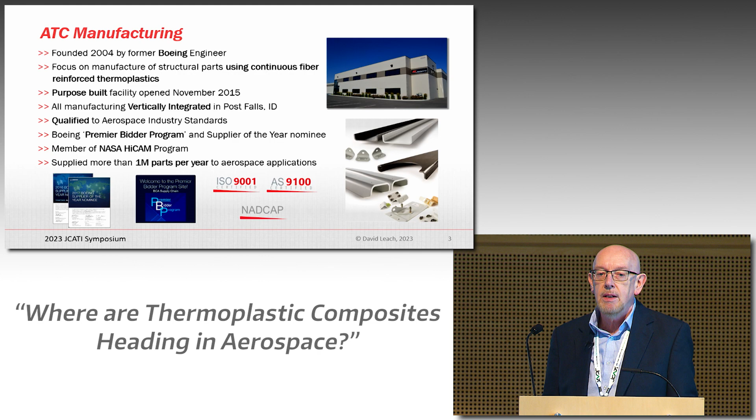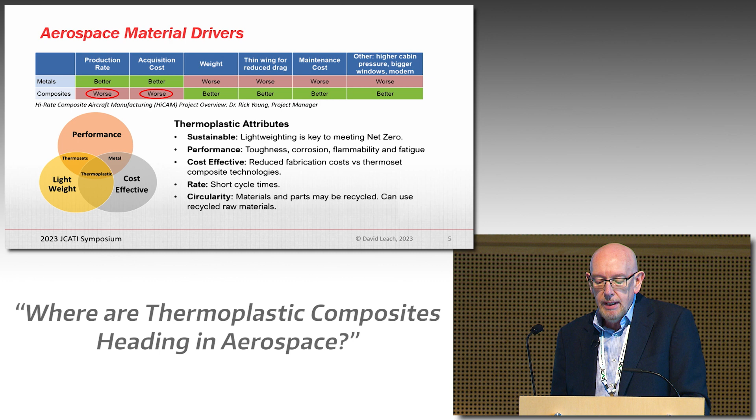Cost effectiveness in terms of very fast cycle times and therefore lower overall fabrication costs, and of course can meet high rates. In addition, I was talking to some of the poster sessions involved with recycling there.

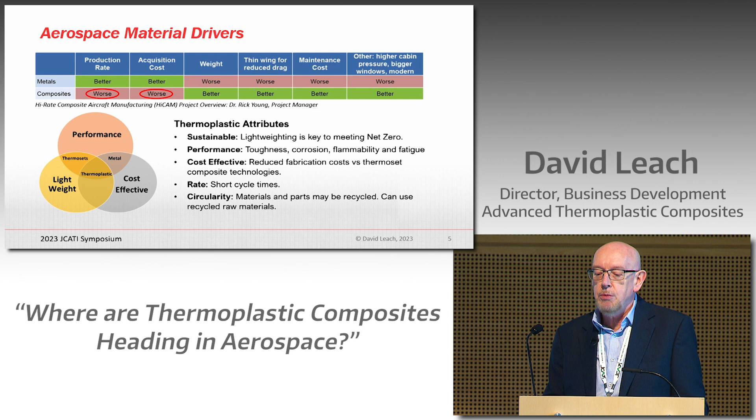Very interesting that with thermoplastics you can recycle them. I should perhaps more accurately say downcycle, because you can take the thermoplastic composite and often chop it, shred it, combine it with other polymer, and then compression mold or injection mold it. And indeed, another side of that is some of the materials we're working with, not so much in structural applications, but more on the interior side, actually use recycled carbon fiber as their input material going into that.

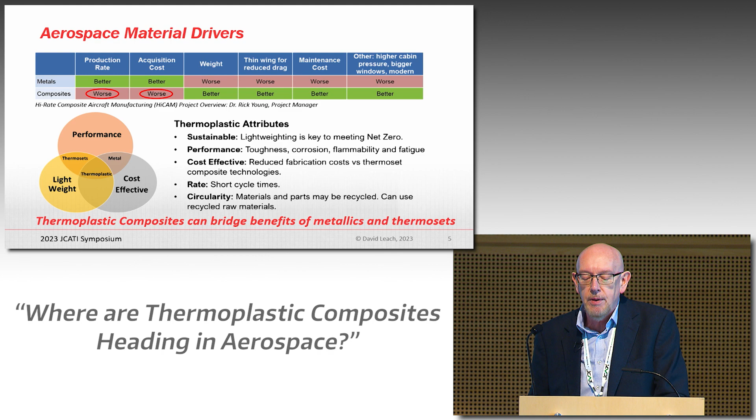So thermoplastics can certainly bridge some of those attributes of both the metallic structures and composite and current thermoset composites. Just another chart related to this.

So certainly for small and medium-sized parts, their conclusion was thermoplastics really offer a pretty compelling advantage, in many cases even over metallic parts as well.

Of course, some of that comes from the handling of the materials. Thermosets require frozen storage, out time issues with thermosets. You lay them up ply by ply, whereas with thermoplastics you can do much more automated processes. Other aspects I mentioned are performance, and we'll also come on to assembly and recyclability as well.

So certainly thermoplastics can offer a really compelling advantage over some of the current materials. Of course, the obvious question is, so why aren't we all building planes out of thermoplastics now?

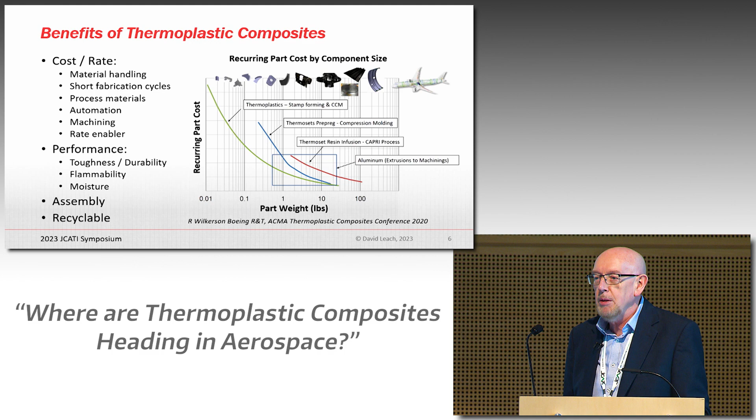Well, some of the materials have not been very readily available. We're talking about very high temperature processing often with these polymers. And the process technology to both impregnate the fibers with these very viscous polymers and then to turn them into a finished part is one of the areas that's really been developing over the last couple of decades.

And so these polymers that I'll be talking about in some of the talk today all have very good resistance to all the environments you'd come into contact with in aerospace, things like jet fuels, de-icing fluids, hot hydraulic fluids, and even in the space area, things like liquid oxygen. These materials are very resistive to that and very tough as well.

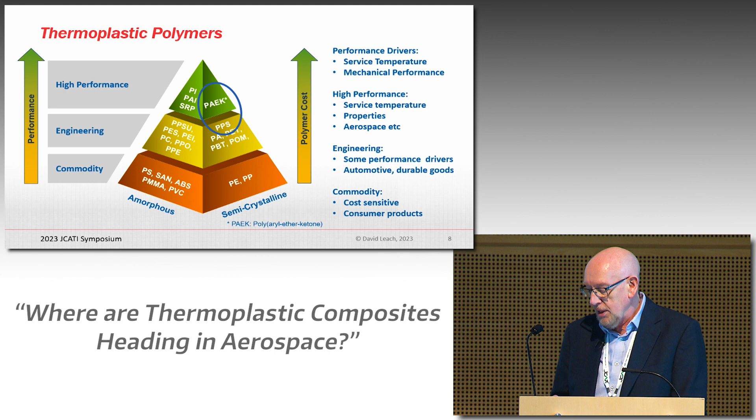When I talk about the range of product forms, then, we're taking that polymer, combining it with a fiber into a composite material. Of course, there's quite a wide range of composites you can make, everything from the very short fiber materials, which can readily be...

extruded, injection molded, compression molded, through to the very highly reinforced materials that are equivalent in terms of fiber content, fiber orientation, to the state-of-the-art thermoset prepregs. So things that are up in the region of 60% fiber volume, unidirectional tapes.

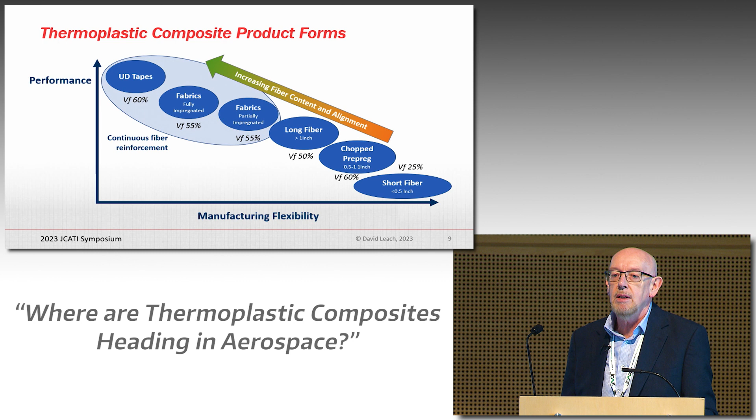So when we're looking at this context with aerospace composites for structural applications, I'm really talking about the things at this very left-hand end here that are really pushing the performance. Although, of course, with that, there's limitations in the manufacturing flexibility with continuous fibers and again, very viscous polymers.

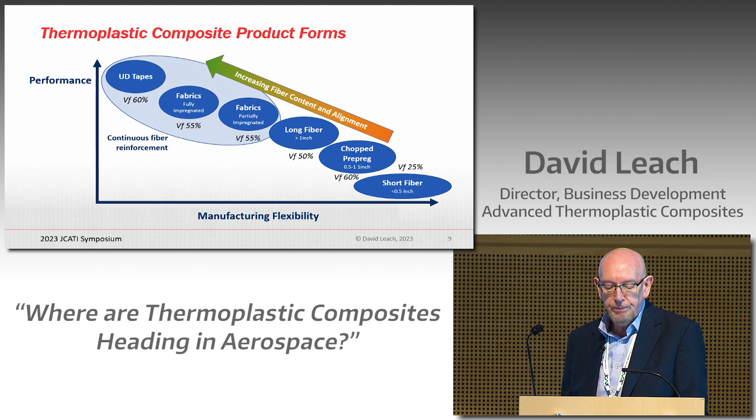Now there are quite a range of materials available. If you went back maybe 10 or 15 years, the range of materials was extremely limited—maybe a choice of one unidirectional tape and a couple of fabric materials, and that was about it. Now there's quite a wide range of different composites available, starting with fully impregnated unidirectional tapes available from many suppliers with many different polymers.

There's an illustration here from the Thermoplastic Composites Research Center people, showing photomicrographs across three different prepregs from three different suppliers. Nominally these are the same polymer, the same type of fiber, the same fiber areal weight, and the same resin content. Yet the fiber-resin distribution can be very different depending on the prepreg technologies used. This is one of the things I'll be talking about—the interaction of the material or product form with the processing, which is often very key with thermoplastic materials. You'll see quite differences in terms of uniformity of thickness, fiber-resin distribution, and degree of impregnation.

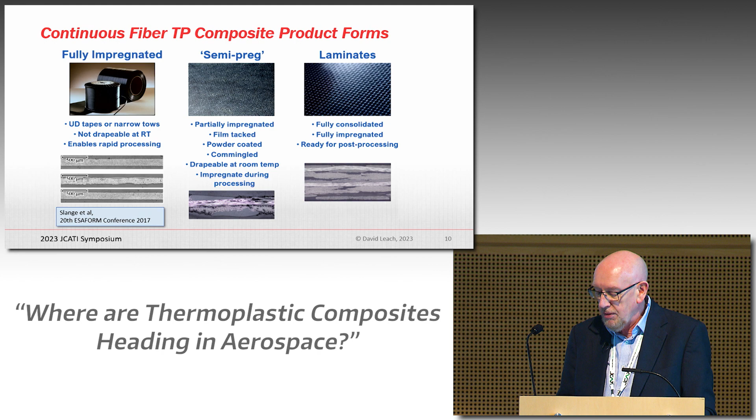So basically there's quite a wide range of material forms now available in terms of polymers, reinforcements, and overall product forms. As I mentioned, you have this trade-off: fully impregnated forms can be processed very quickly because the impregnation has already been done and fibers are fully wetted out, versus partially impregnated forms, which have the advantage of handling and drapability at times—but you have to impregnate them during processing, which means a longer time.

The materials are maturing—things like the consistency of the prepregs and degree of impregnation have definitely been improving. Another point is around databases. In aerospace we typically need certified databases and design allowables, material specs, and process specs. Until recently that's been the domain of the OEMs who have the horsepower to generate that information. But now more materials are being added to the NCAMP databases—that's out of NIAR, the National Institute of Aviation Research at Wichita State, which has standard specifications and databases. I think there are now three thermoplastic materials with full NCAMP quals, and quite a number more in process. That means information on properties, design, and process specs is coming more into the general domain and can be used by anyone, as publicly available databases.

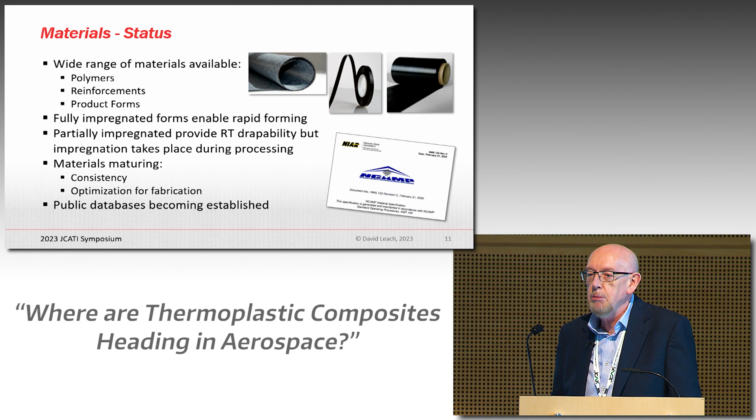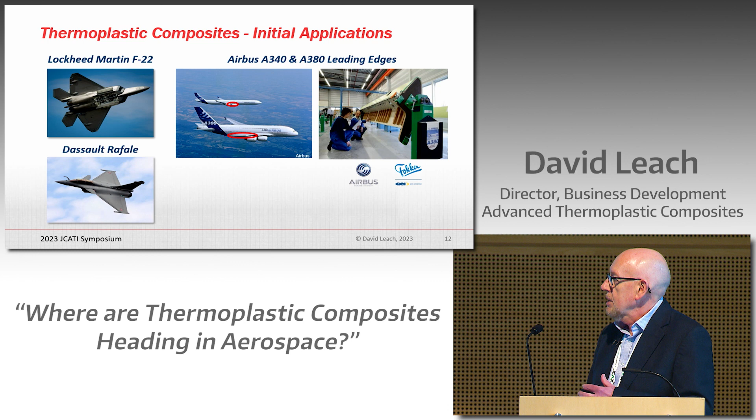If we talk about some initial applications for thermoplastics, going back 20-plus years when some of these materials were first coming out, the initial emphasis was much more driven by performance, particularly toughness and temperature. As an example, on the F-22, the weapons bay doors were made out of thermoplastic—actually a PEEK IM7 material. Also in Europe, the Dassault Rafale's internal center fuselage section was done in thermoplastic, again a PEEK material. Some of the reasons on the Dassault were because it's around the area of the engine—they were looking for both high temperature performance and flammability resistance in case of an overtemp condition.

Also in Europe, with some of the fabric materials, they were adopted by Airbus and GKN for the leading edges—the inboard for the A340 and the outboard for the A380. That's been pretty well publicized, with a lot of information available on it.

I'd characterize some of these initial applications as more point applications, where people were really learning how to process the materials, often using techniques borrowed from thermosets to form the finished parts, which was not optimum in terms of cost or rate. But it was important in demonstrating some of the early applications of thermoplastics and their benefits.

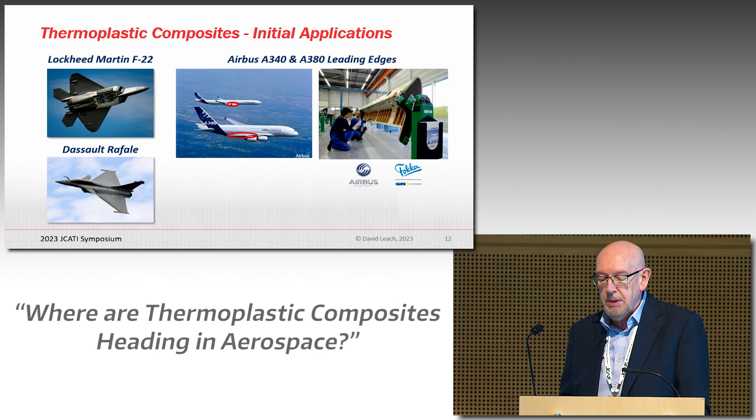So if we come to how we're making parts today, which has progressed since that time, we typically start with material preparation. Again, these are dry boardy materials if we're starting with the prepregs. So we have to assemble those prepregs, often with highly automated processes, into the layups we need, and get the plies assembled, because you have to tack those plies together. The materials don't have any inherent tack, so you're often using either thermal or ultrasonic tacking to prepare that.

Then very automated processes make a laminate or a blank, which is then thermoformed or stamp formed, usually rapidly formed into the finished part, or alternatively going through a one-step process directly from the ply layup into the finished part. So these elements are specific to thermoplastics.

I've left the back end on this as well because you still have to go through all these processes. There are some differences in how you do those with thermoplastic composites compared to thermosets, but you still have to go through them. So the real benefit, particularly in terms of cost and rate, is in this part of the process of getting your material prepared and then turning it into the finished part.

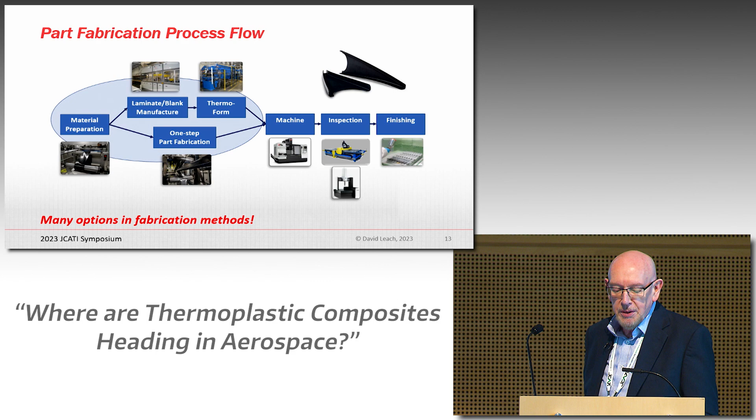If we then come on to talk about where we are in terms of current applications - in parallel with some of those initial point applications, there were folks, particularly in higher volume uses like commercial aircraft, who identified very good opportunities in quite simple parts used in high volumes. Especially as both 787 and A350 came along, there was strong desire to use all composite structure to avoid issues like aluminum next to carbon fiber composite and galvanic corrosion.

So a lot of these smaller detailed parts that historically would have just been aluminum, there was a big driver to convert those over to composite. And thermoplastics was kind of the ideal material there for these high volume, smaller, more detailed parts - typically clips and brackets down at the bottom here.

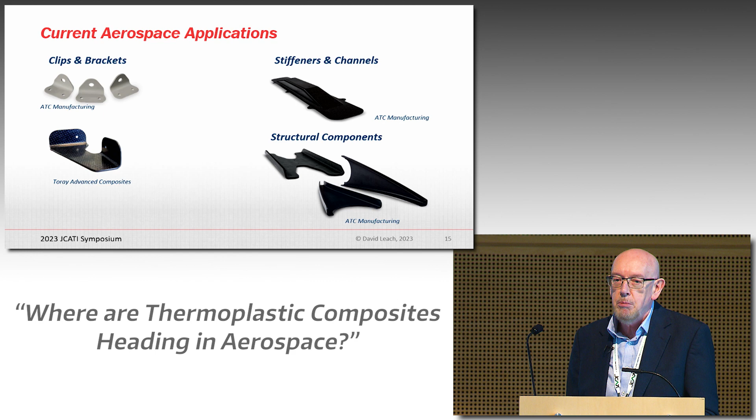This is one of the A350 frame clips - that was one of the big applications on A350, with many thousands of those on one aircraft. And then also moving into some more complex parts, a deeper drawn continuous fiber part here, which is a stiffener, channels, and then into full structural components. Indeed, there are primary structural components flying around now out of thermoplastic composite unidirectional tape materials, and indeed full assemblies.

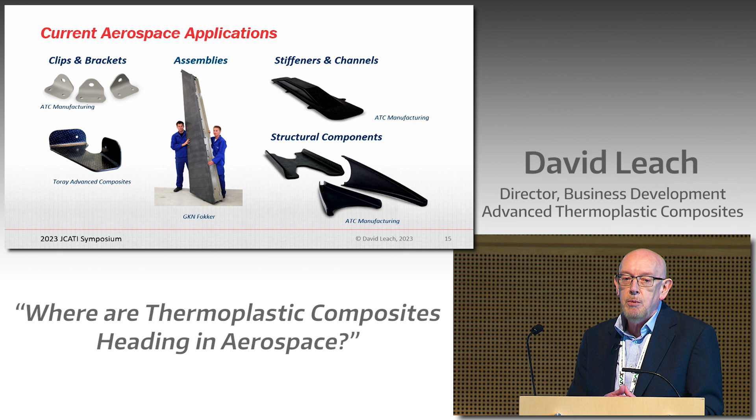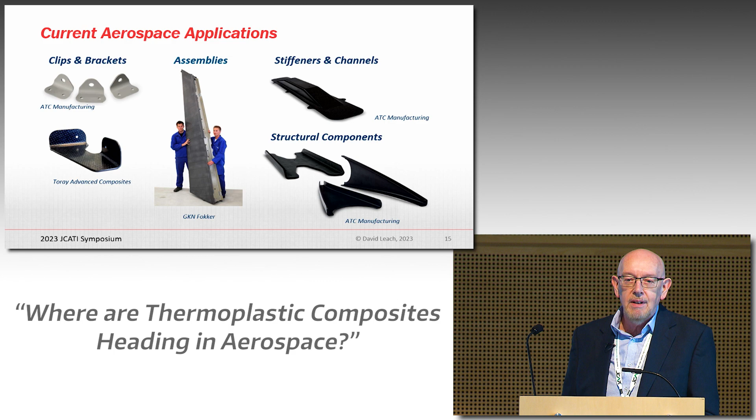GKN Fokker - the GKN name will come up a lot in the Netherlands. This is the Gulfstream G650 rudder, and they've done a lot of work developing that with PPS fabric materials and using welded assembly for that as well. So again, these are flying around, many millions of parts actually in service now, although they're in areas you wouldn't necessarily see - the bits that hold other structure together, or hold hydraulic lines or electrical lines throughout aircraft.

So in terms of the current status, thermoplastic composites are now pretty well established in a lot of these small to medium-sized parts, generally the higher volume applications. But I'd also say they've often been limited at this point to constant thickness parts. And that's the practicality - we're often preparing a laminate or a layup that is then going to go into a forming process, so they tend to be constant thickness.

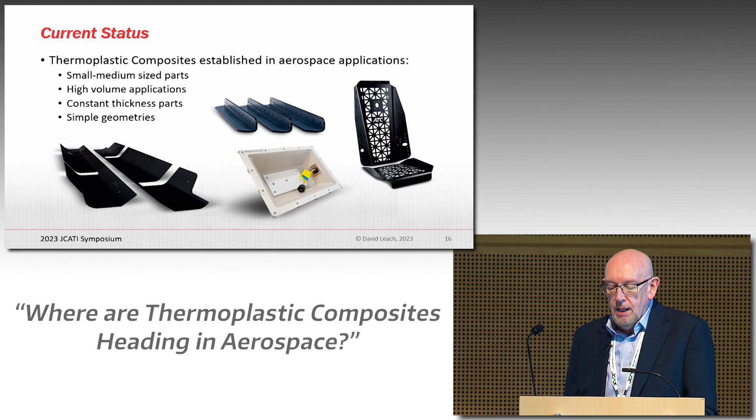And somewhat simple geometries - again, things like the illustrations here, the L's, the open sections here. This is a deeper draw part, which is a little more complex, although not as structural. So they have a certain niche that's already quite well established. But really the question is where do we go in terms of the next step? And that's where I think is pretty interesting, where I want to concentrate the rest of this discussion.

Along with that, things like window frames, ribs, fuse frames, floor beams, spars. There's a lot of interest in these sorts of parts. They're still relatively high volume. Obviously, the design often gets tailored throughout the aircraft, so it's not like there's necessarily just one floor beam all down the length of the aircraft. But even so, there's a limited range of different designs, so it really lends itself to high volumes.

Similarly with things like fuselage frames as well. Again, there can be different designs along the aircraft, but really high volume that can be adapted very easily for thermoplastics, and also going for a much more integrated structure.

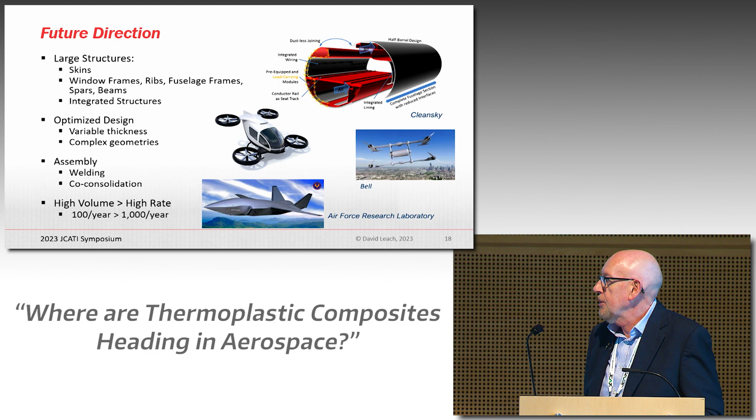Just to talk about that a little bit, we've got to put it in context, because there's often a lot of discussion about aerospace quality at automotive rates—that's often a tagline. But just to put that in context, if we look at current rates, as an example with the 787, it's 160 a year. In fact, on record, the largest number of 787s ever delivered in one calendar year was 2019, when 158 were delivered.

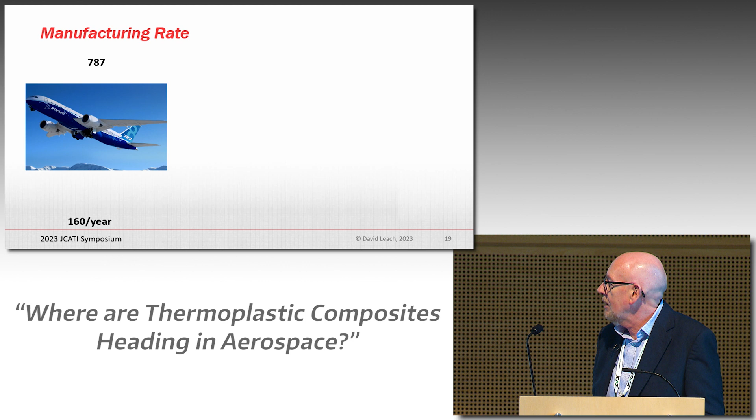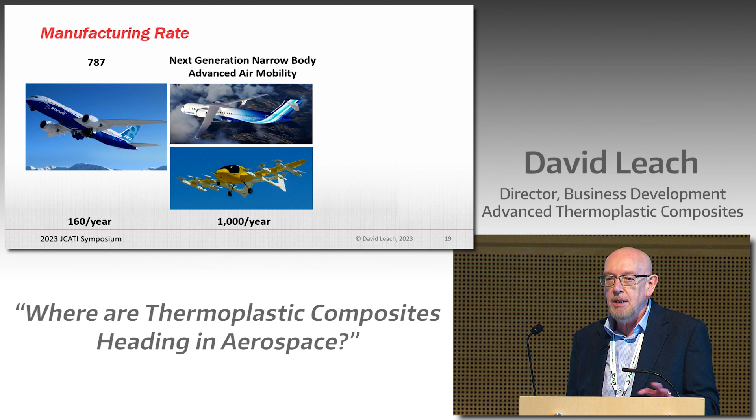So that's a bit of context for current composite production rates at the state of the art. Where we're looking for the next generation narrow body aircraft, and also advanced air mobility, you're probably looking at about 1,000 vehicles a year—that's the nominal production rate. Obviously within that, you may have components that are not just one per vehicle but used many times, so the actual rate of an individual part could be a lot higher than that.

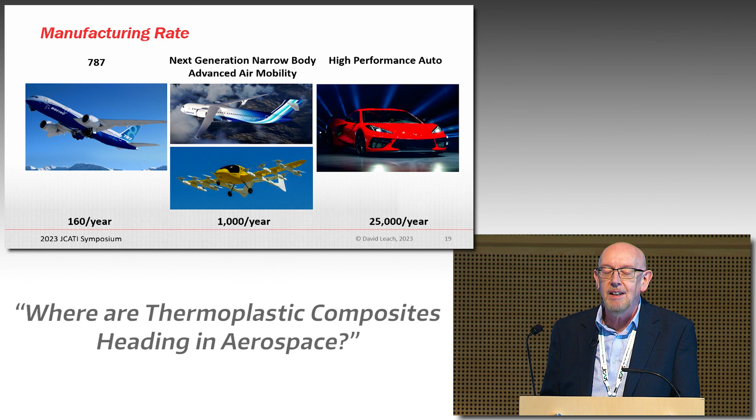But if we look at the high performance auto end and take a Corvette as an example, it's at about 25,000—that would be a typical production rate. So we're talking about roughly an order of magnitude as we go from where we are now to where we want to be. But if we're talking about automotive, even high performance automotive, it's yet another order of magnitude. So we're in this middle ground between something that's more a cottage industry at one end, compared to something you can really fully automate at the other. At this range of about 1,000 parts per year, you've really got to look at what's the cost of getting to full automation, what's the business case related to that. So it's an interesting industrial engineering challenge as well.

So in terms of how we're going to change things, a lot of the parts we've been making to date have been kind of small to medium size, a few feet in size. We're talking about getting much larger parts, larger structures. So how do we do that?

Well, first of all, we really have to move to automated processes, and fiber placement is the most obvious one to move to. There's been a lot of development work going on right through the supply chain, from people who build AFP equipment, to developing materials more suited for fiber placement, through to the OEMs doing development work, and indeed the government agencies. NASA's actually done quite a lot of work on thermoplastic AFP.

Obviously, one advantage is we're essentially unlimited in terms of the size of parts we can make. AFP is very well established with thermosets, used for decades now, so some of the same approaches can be used, particularly with topology, layout patterns, and so on. The key difference is how do you get the material down and consolidate it? With thermosets, you typically heat them up a little, often with infrared heating, just to reduce the viscosity and improve the tack as the plies are laid down so they'll adhere to one another.

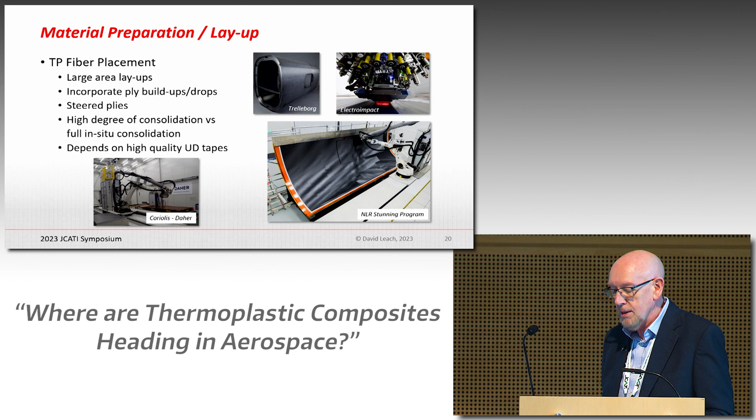The other thing you can use AFP for, obviously, is to build up different ply thicknesses, but also to steer the plies. This is from some specific work we were involved in, initiated through Spirit. They were the lead for this, specifically looking at fuselage frames for a demonstrator they were building. This was a partnership with Spirit, Electroimpact, and ourselves.

If you imagine the blank that you need for a curved fuselage frame, it would be roughly this shape. If you took a simplistic or traditional attitude, you would just lay it up in your usual 0, 90, 45 layup. But of course, that means the fiber orientation is effectively changing constantly around the curvature of the frame.

So what Electroimpact did was enable steered plies. Again, something established in thermoset materials for some time, but with thermoplastics' rigid input material and very viscous polymers, that's not straightforward to do. But Electroimpact came up with a process to steer, as an example, the 0-degree plies around the radius, and the 90s and the 45s, so they were radial.

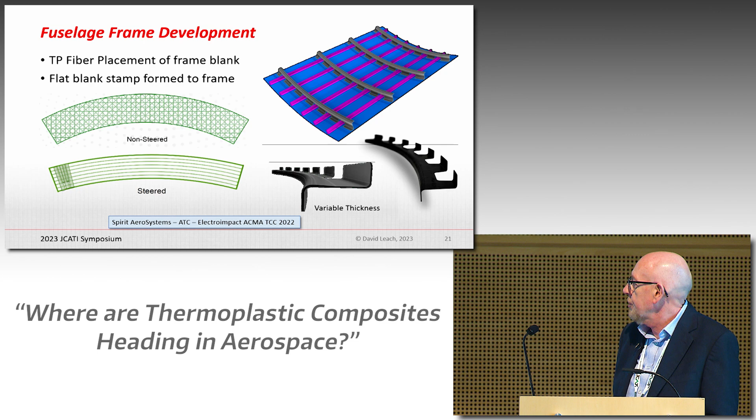If we're going to take those AFP layups, or indeed other ways of consolidating the plies, or preparing the plies I should say, you then still have to consolidate them or form them into a finished part. And if we're talking about big parts, it's like, okay, how do you actually do that?

So several options here that are all being looked at. There's large-scale stamp forming. Big presses are readily available, been used for many years, particularly in the metals industry for stamp forming of parts, of course. We can use some of that same technology, but with a lot of provisos.

First of all, we're heating a blank that has to be at a very precise temperature, moving it across to the stamping station. You have to use a heated tool, which also has to be at a very precise temperature. And the tools you're stamping it in also have to be very tightly dimensionally controlled. So while you can use some elements of existing technology, there's a lot of other things you've got to look at in terms of how you're going to manage this.

But it is an area that's being looked at very actively. As I mentioned, Airbus has announced that they're putting in a 5-meter, 3,000-ton press at the Bremen facility in Germany, specifically to stamp form thermoplastic composite structural parts.

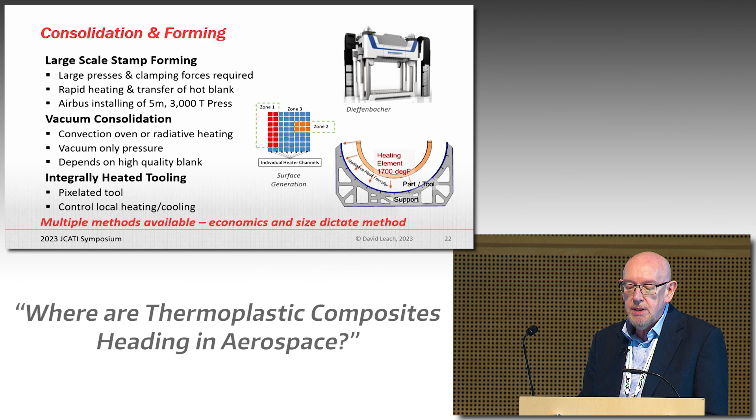Welded assembly—there's various techniques already available for welding that have been proven, certainly on the smaller scale, even at production levels, with resistive welding, induction welding. A lot of the induction has been done with fabrics because you typically don't want to use a susceptor in there, which puts a defect into the weld zone. And in terms of inducing the current and therefore the resistive heating in the weld, fabrics lend themselves much more because you get the induction loop created.

Unidirectional materials is more of a challenge, and there's quite a lot of R&D work going on right now to really be able to characterize that and focus the heat into just that area of the weld.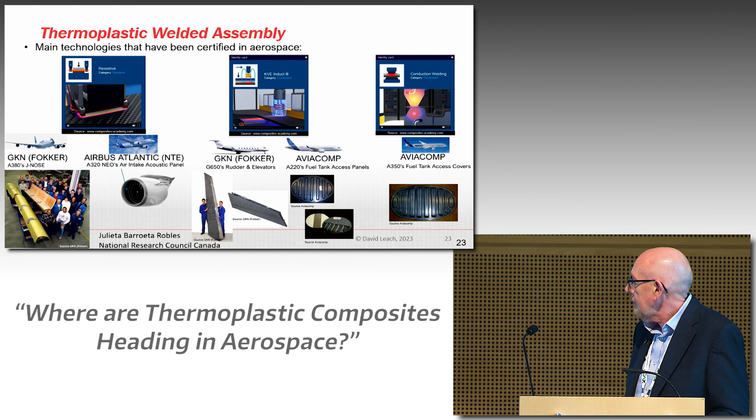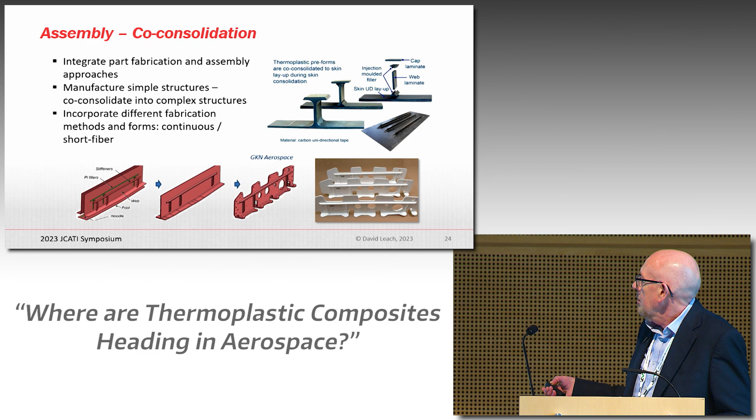Another approach, of course, is co-consolidation. GKN has kind of championed this, making multiple small parts and then co-consolidating them all together in a structure. This was some of the work they did for a demonstrator wing rib, made up of a range of different elements, particularly using simple shapes, often flat, straight shapes, which don't need their own forming, but joining these often with short fiber reinforced parts, then getting a full integral structure by going through the whole co-consolidation process.

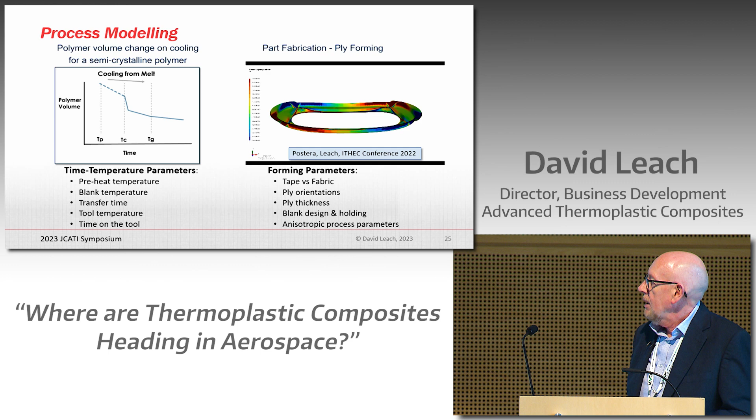I just mentioned briefly process modeling. We've kind of touched on process conditions a little bit, and how we control that, because we're starting off at quite a high temperature, in excess of 700 Fahrenheit. Cooling down, the polymers become more and more viscous. You hit a crystallization point, which is solidification, a stress-free temperature. You also see a large volume change at that point as the material crystallizes. And then a couple of regions of temperature performance as you cool down through the TG.

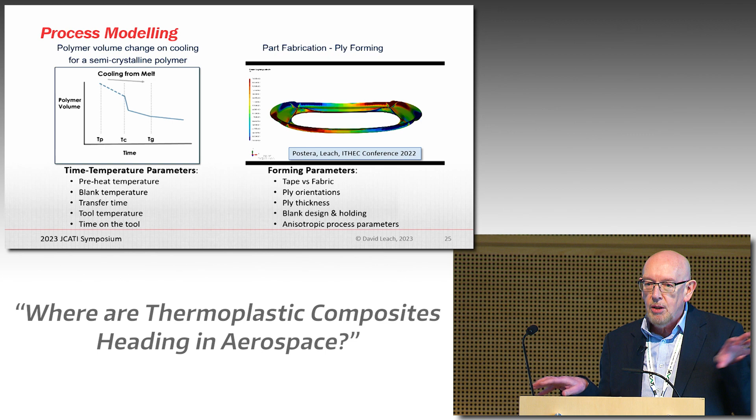And then the ply orientations, as we've seen in the illustration here on the right. So developing modeling software tools that are really specific to thermoplastic composite forming, which draws a bit on isotropic materials like metal forming that's been done historically, combining that with some of the composite forming approaches.

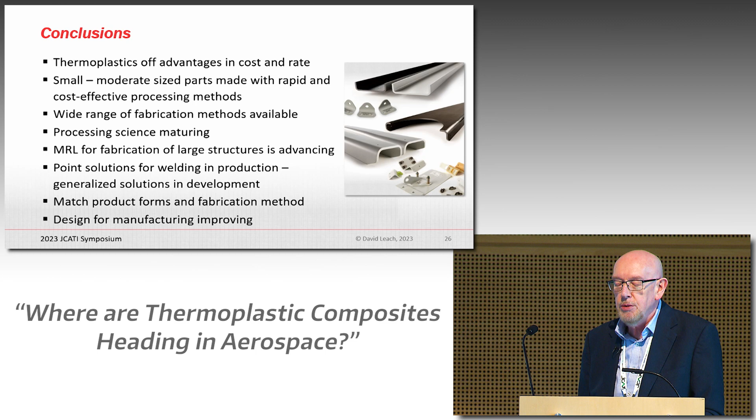So finally, in conclusion, thermoplastics can certainly offer advantages in terms of cost and rate. Small to medium-sized parts are really well established, with a wide range of fabrication technologies. We're certainly seeing a lot of maturing of the process science, and the MRL levels for large structures are really starting to develop pretty well. And there's a need to match the product form and quality to the fabrication method and design-for-manufacturing approaches, particularly tailored to rapid forming of thermoplastics.

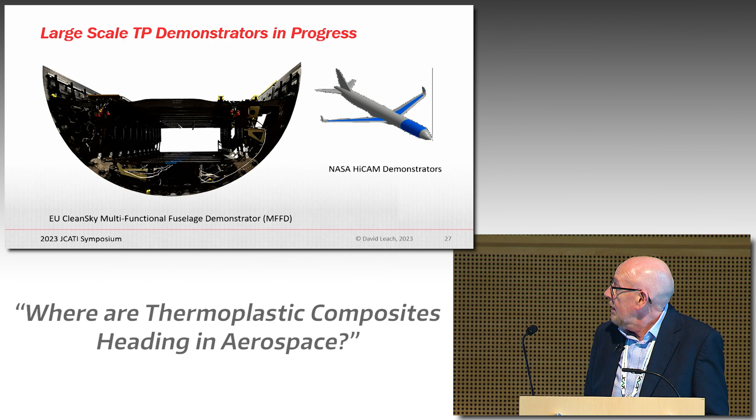And just to mention one last thing, if you're interested in thermoplastics, the SAMPE conference is actually right here in the conference center in downtown Seattle next week. In addition to some thermoplastic sessions, the FAA JAMS sessions will be on there, and there'll also be papers from the NASA HiCAM program. Then about a month out, in May, Composites World is having a virtual tech day specifically on thermoplastics for large structures as well. So a couple of things coming up there. Thank you.